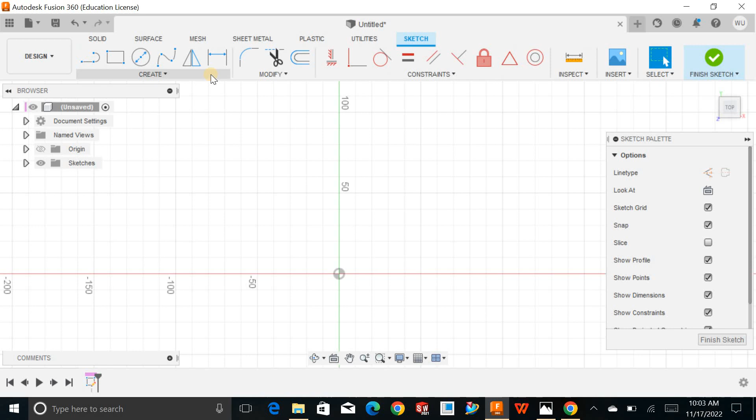Open your Fusion 360, click on Create Sketch, choose this horizontal plane, go for the corner rectangle, and draw a rectangle like this. Go for dimension. This becomes 100 and the width becomes 40. Hit enter and finish the sketch.

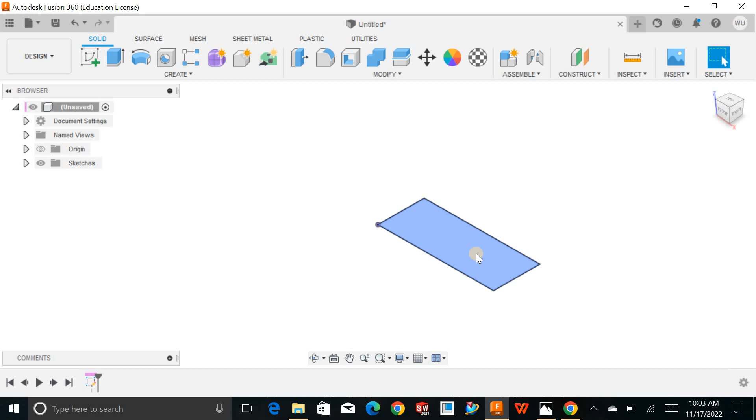Just right click on the region and go for press pull. Define the height 20 and hit OK. See?

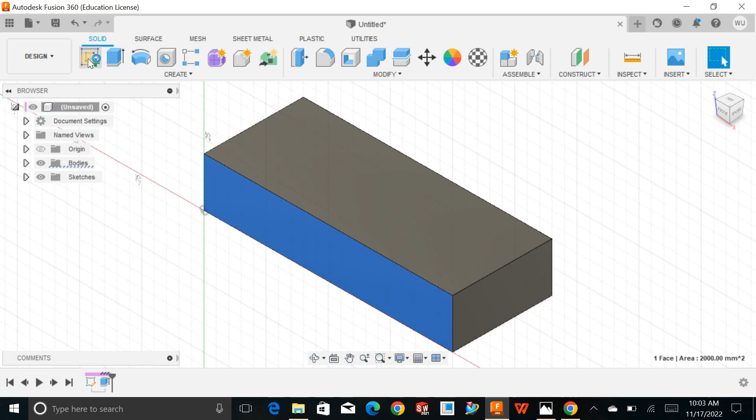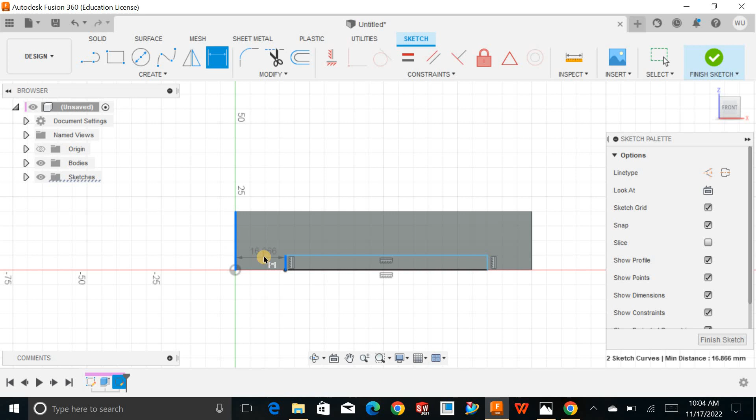Now we will create a cutout of 8 mm. For this, I'll choose this face and go for Create Sketch. Draw a rectangle like this and go for dimension. The distance becomes 12 and 12 from that side. If you come over here, I will draw a dimension from here till here, this becomes 12, and from here till here, from this line it becomes 12, and let me zoom, this becomes 8.

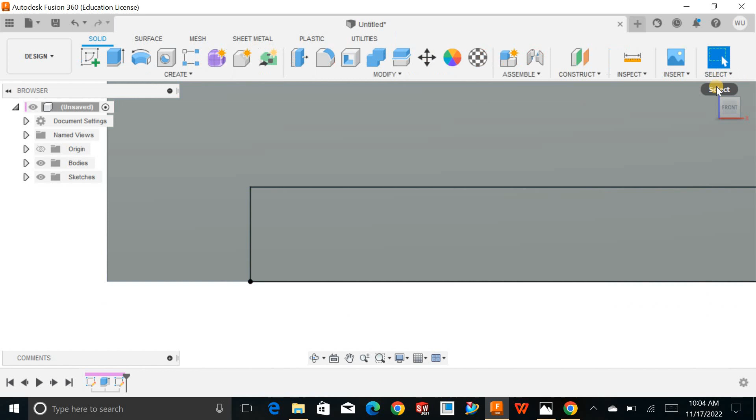I'll finish the sketch, select the region, say press pull, and drag it in this direction, and make sure you select the cut, and I will hit OK.

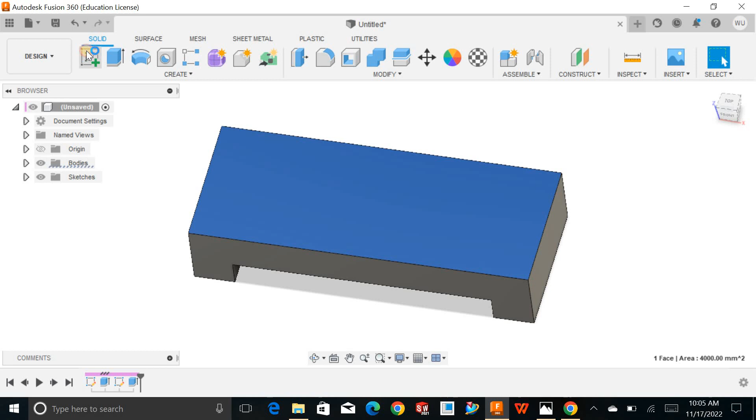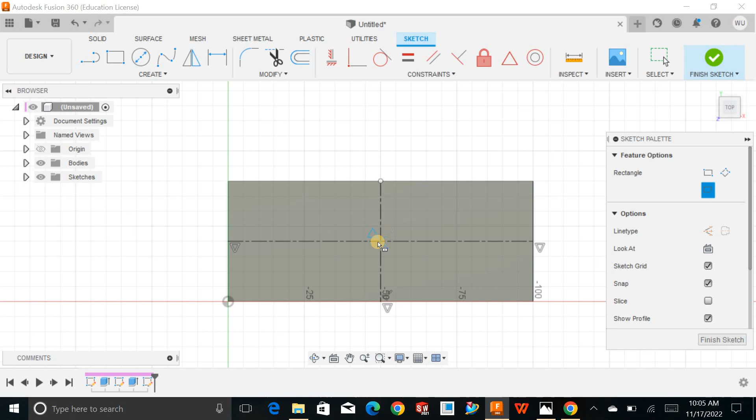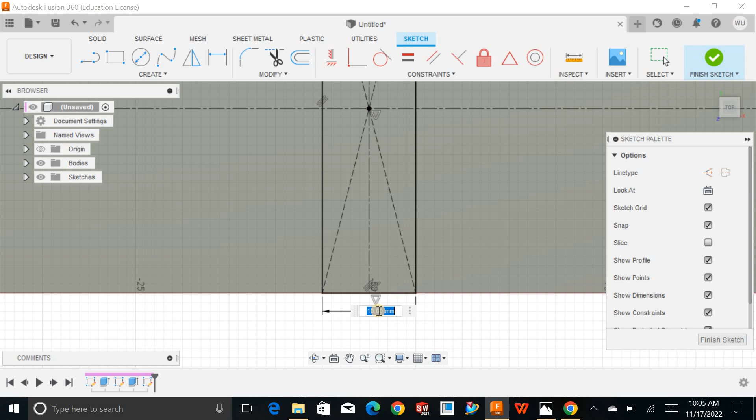Next, we will go and add this portion. For that, I'll choose this top plane, go for sketch. Before that, we are going to add some center lines like this, and again a center line like this, then go for a center rectangle like this, and now go for dimension. The width becomes 20 and the height becomes 24. So define this one, which becomes 20, and I'll finish the sketch.

Now I'll go for extrude, select the regions that you want to be extruded, and define the height 24, and this time I will select join.

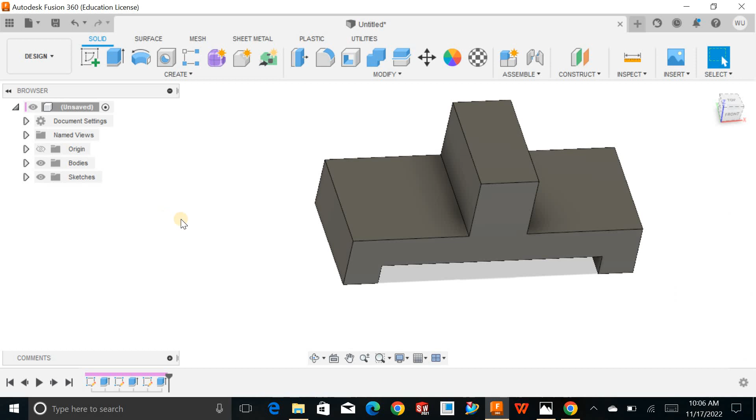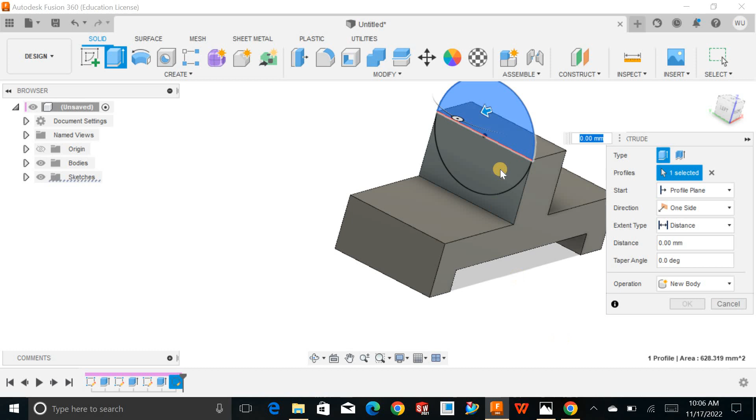Next, I will choose this face, sketch on it, and go for a circle like this. If you go for finish sketch, then I'll go for extrude, and I'll just extrude this region, and this time drag it up like this, and hit OK. See?

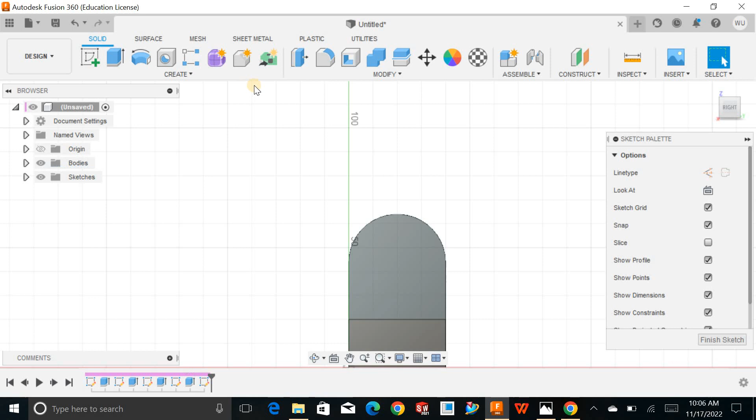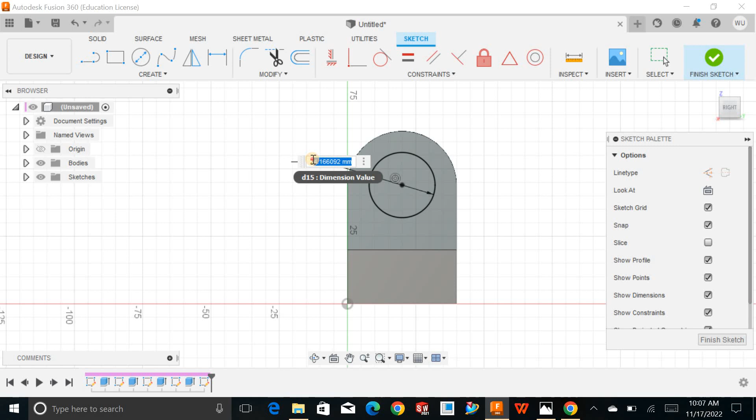Next, we will create the cutouts. For that, I'll select this face, sketch on it, and go for circle. Draw a circle somewhere here. Make sure both circles are concentric. It's fine. And define the dimension. The diameter of this hole is 24, as radius given, which is 12. Sorry, it gets some larger, I'll say 24, and finish the sketch.

I'll go for extrude and cut. Again, create these two holes of diameter 12.

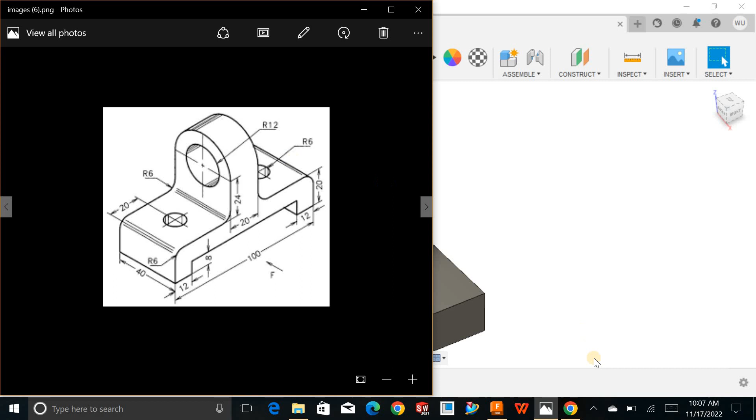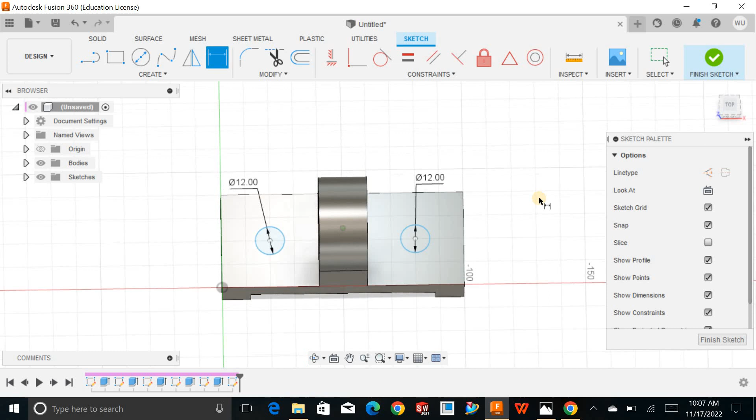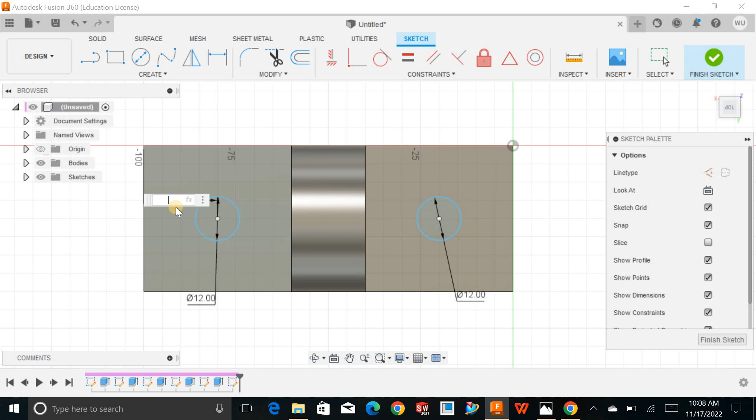For that, I'll choose this face and add two circles like this, and define diameter 12, this one also 12, and look at this top surface. Then I need to define another dimension from here till here. This is good. And from here this becomes 20, and from here till here this is also good.

Next I will go for the cutout, and I will create a cut like this.

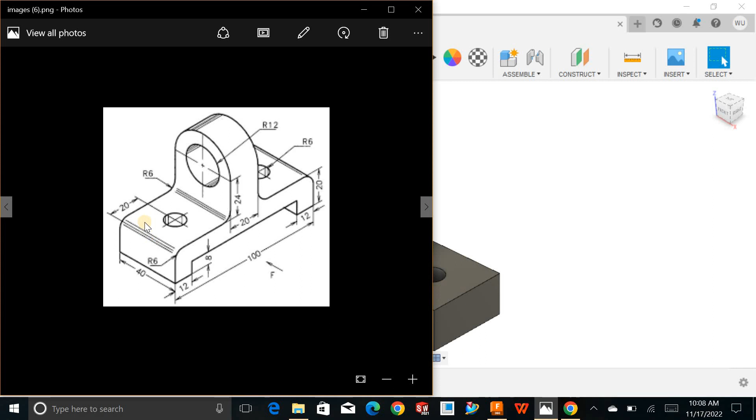Finally, we need to do one thing, and we would like to add some rounds of 6 mm. For that, click on round, choose this edge, this edge, this edge, and this edge. Define 6, and I will hit OK.

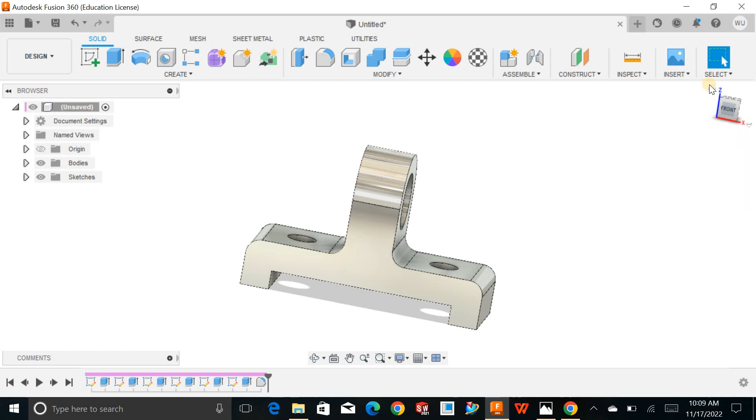this is really amazing. Hope you enjoyed the tutorial.